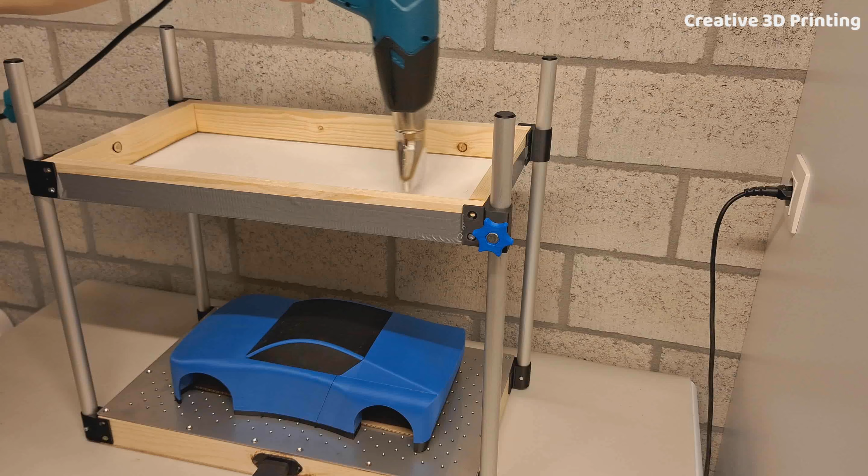Today I am building my own vacuum former to make a lighter body shell for my RC car. My current 3D printed body shell weighs 810 grams, which is way too heavy. That's why I want to switch to a vacuum formed body shell made from PS or PETG. Actually, I am building two: first a small prototype version and then a larger wooden version.

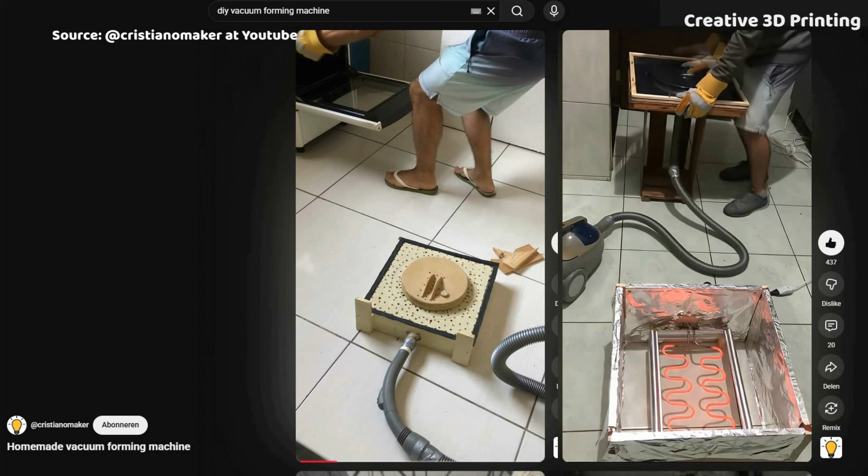I came across a video online of someone who built a small vacuum former using just an oven and a vacuum cleaner.

So I decided to start small. Within 24 hours I had made a fully 3D printed vacuum former, and it worked first try.

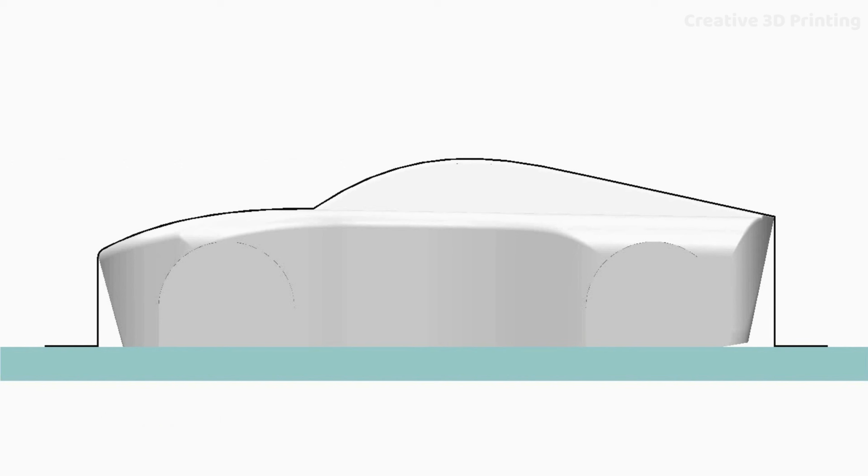The only issue is that the body shell itself isn't really designed for vacuum forming, because of the chamfered edges at the bottom. I'll fix that later in the video. It wasn't perfect, but it proved that the concept works, and more importantly, that scaling it up would be possible.

After that, I started doing more research, and for inspiration I looked at this video.

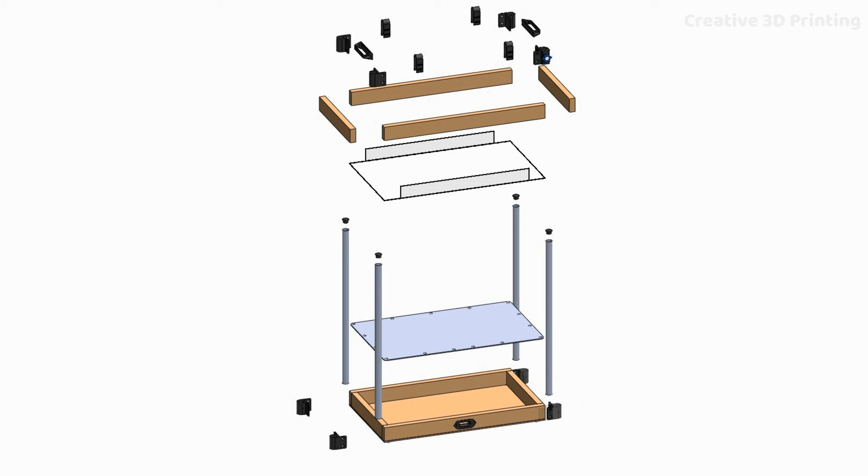Then I started designing everything in 3D. The design came together pretty quickly, with wooden beams, a base plate, a stainless steel sheet, aluminium tube profiles and some 3D printed mounting parts.

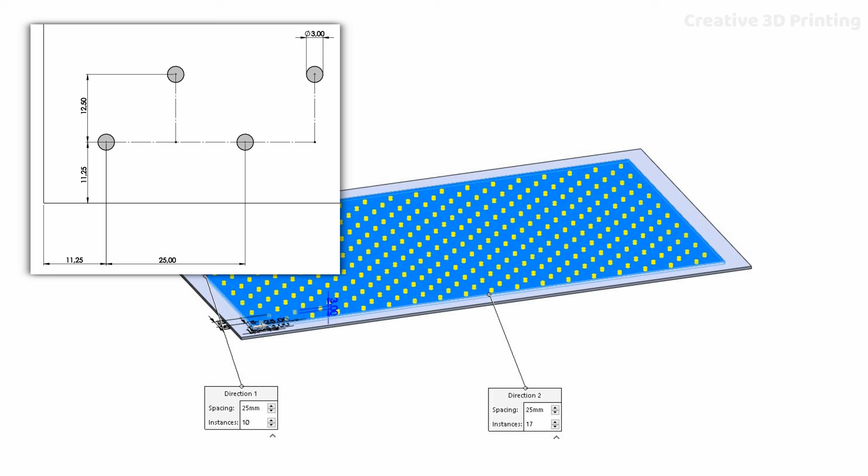The stainless steel plate needed a large number of holes with the correct size and spacing. So I gave AI the right parameters and it calculated the optimal pattern: 170 holes with a spacing of 25 mm and a diameter of 3 mm. I imported that pattern into my CAD software and just like that the full design was complete.

After that I ordered all the parts and printed the required components. I started by cutting the wooden beams and aluminium tubes to size, using the grinding stand I made last year.

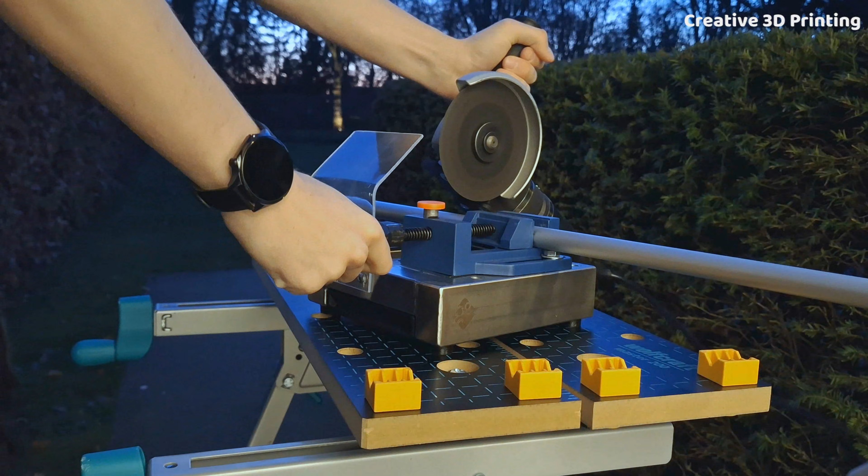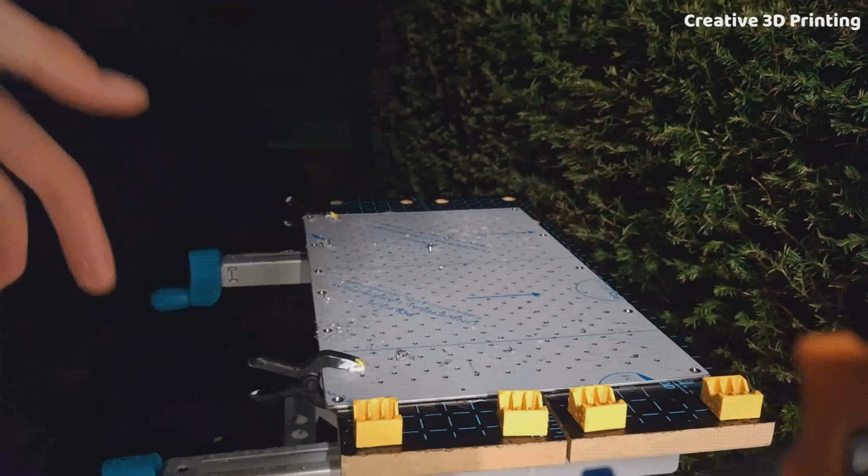In one of the wooden beams I made an opening for the vacuum cleaner connection. The stainless steel plate was punched and then I removed all the burrs for a clean finish. Once everything was ready, assembly could begin.

First I glued 4 wooden beams onto the base plate. While the glue was drying, I used my 3D printed clamps to hold everything in place.

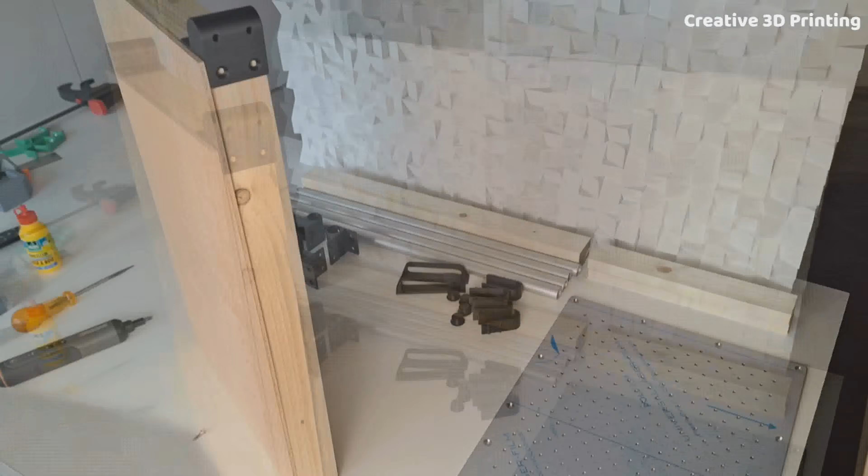Then I mounted the 3D printed parts using short screws. A lot of my screws were actually too long, which caused the wood to split, so in the end I used fewer screws than originally planned.

After that I glued the top frame in place, making sure it aligned properly with the bottom frame. These need to match perfectly in the end. Because my grinding stand isn't perfectly square, some of the cuts were slightly angled.

Luckily that's easy to fix with sealant. I used bisonwood sealant for this. The only thing is that I forgot that you actually need a caulking gun for that. I could have just bought one, but of course I decided to make one myself.

A clamp already looks quite similar to a caulking gun. So I designed a small holder that I could 3D print and slide onto the clamp.

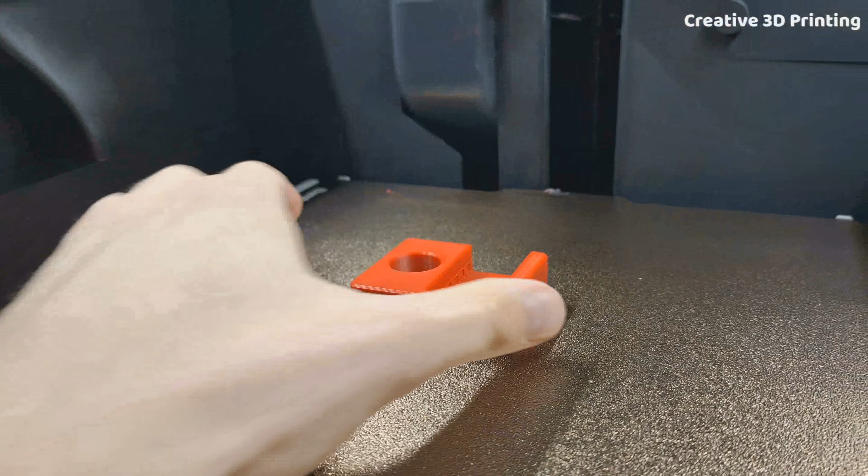With that, I sealed all the seams, the vacuum cleaner connection and the stainless steel plate to the wood. And surprisingly, it worked really well. I might buy a proper one in the future, but for now this does the job. I also printed a small finishing tool to smooth out the sealant.

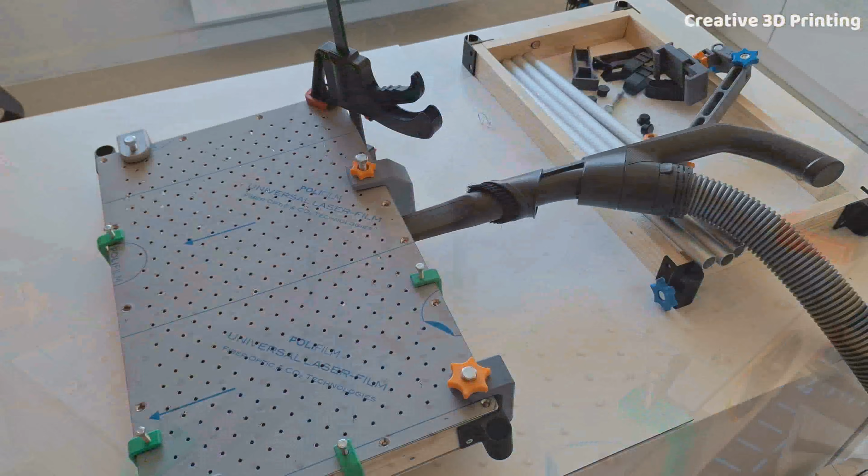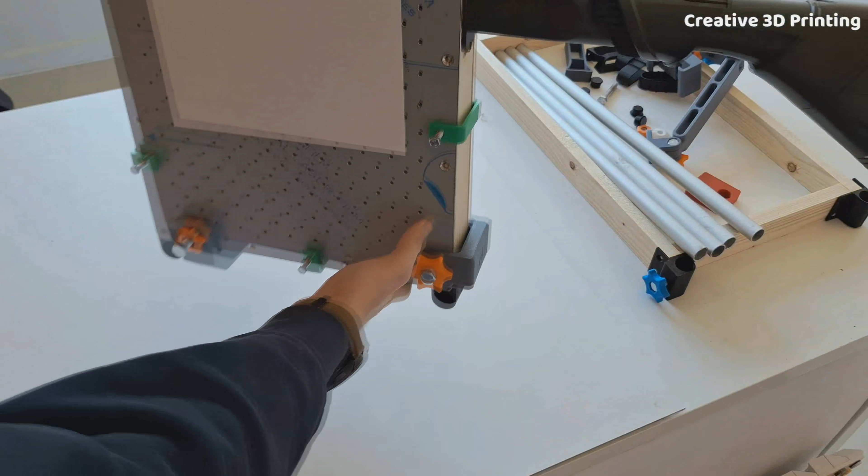Then everything had to dry for 24 hours. After 24 hours, it was time for the first test. I connected the vacuum cleaner, and as you can see, I have vacuum, so the bottom box worked perfectly.

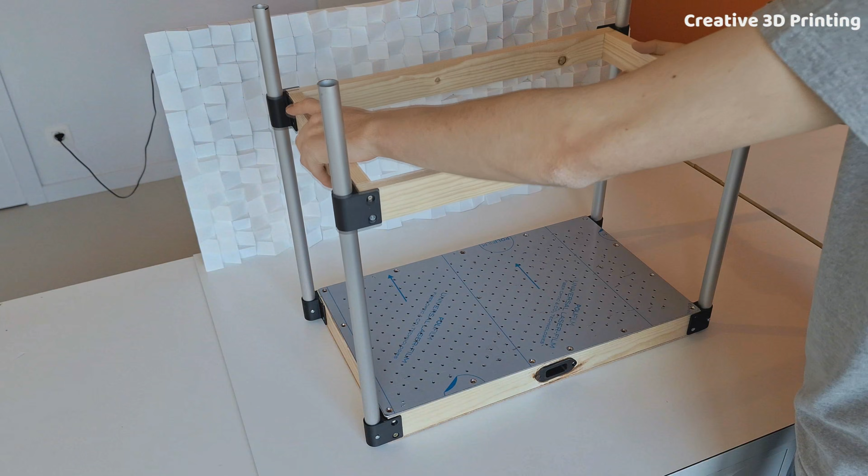Next, I mounted the aluminium profiles and secured them with bolts. Then I slid the frame over the profiles and fixed it in place with a large bolt. After that, I removed the protective film from the stainless steel plate. And with that, the large vacuum former was ready for its first real test.

For the test, I used a 1mm thick PS sheet in A2 format. My previous tests were A6 size, so this was a big step up. I cut the sheet to size and attached it to the frame using duct tape.

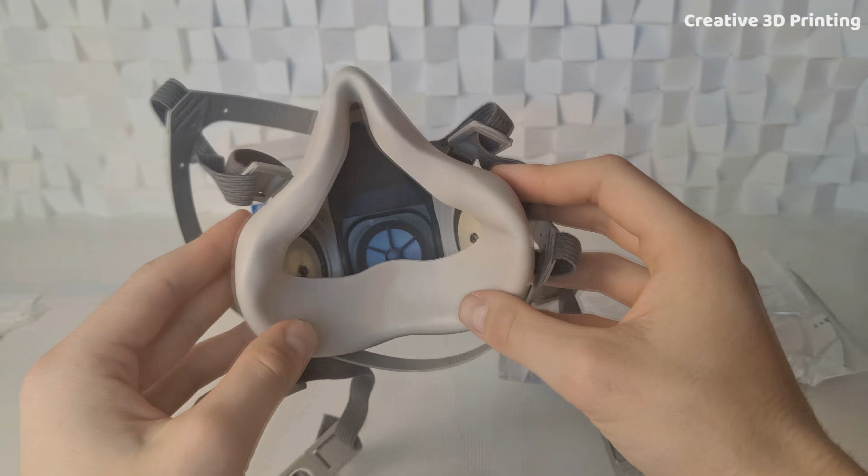Since polystyrene needs to be heated until it becomes flexible, I also used a half-face respirator with an ABEK1 filter on each side and a dust filter.

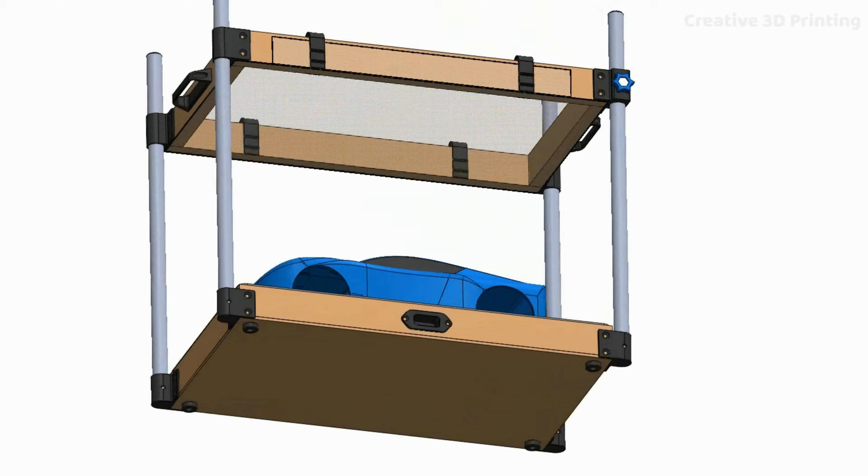Because the body shell is quite large, too much vacuum would be lost through all the open holes. So I placed a piece of cardboard under the mold to block some of the holes. Then I heated the sheet for about 5 minutes using a heat gun. I turned on the vacuum cleaner and lowered the frame onto the body shell.

But unfortunately, the sheet was too large to heat evenly. By the time one section was ready, the rest had already cooled down, and because of that, it didn't work. I tried again with a smaller shape, but that didn't work either. The sheet cools down too quickly, and it also seems like there wasn't enough vacuum.

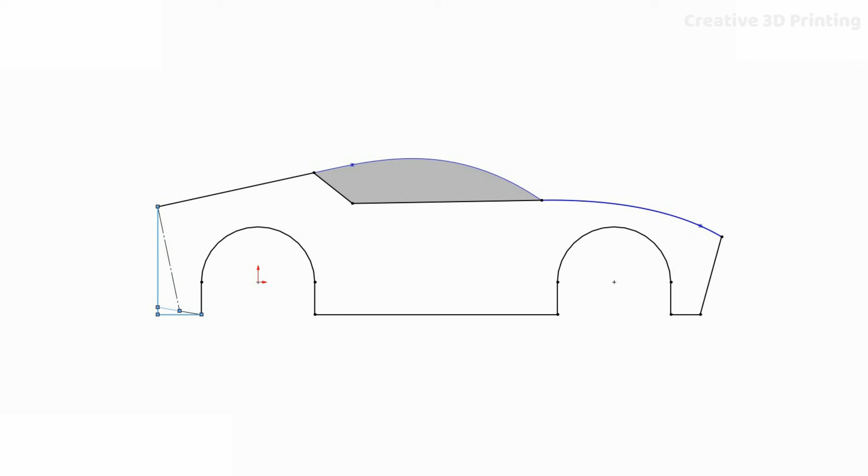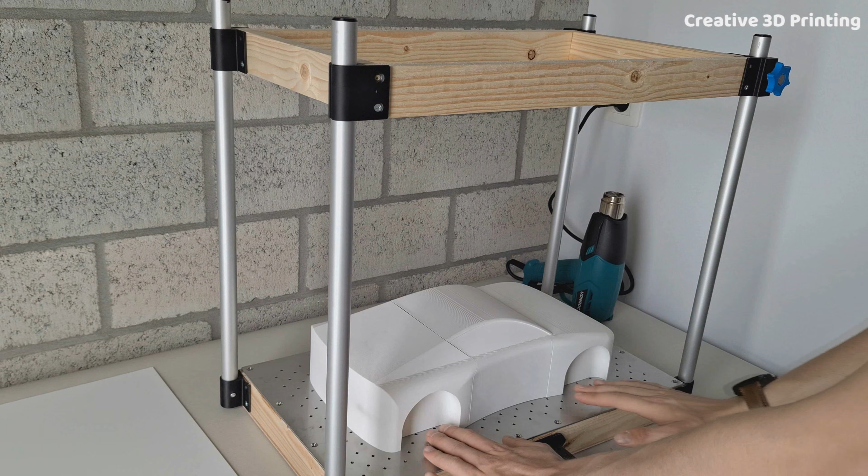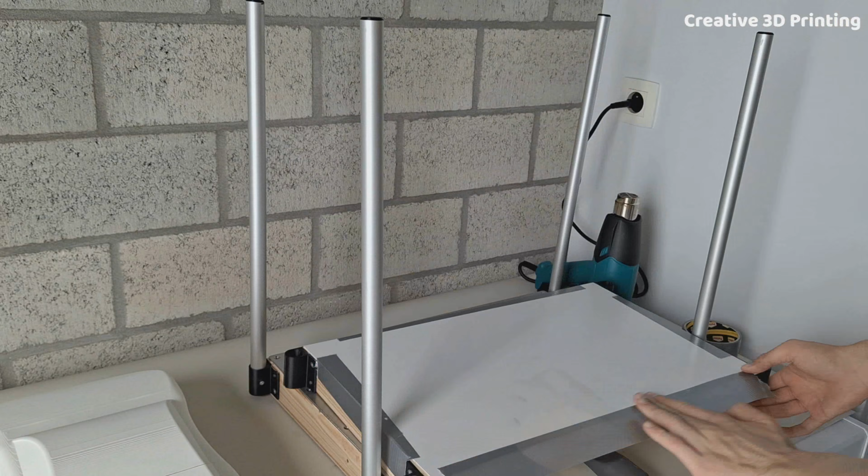Since the large vacuum former still isn't working optimally, I'm going to give it a third attempt. This time, I'll approach it a bit differently. I'll modify the body shell slightly to eliminate so-called vacuum traps or undercuts. I will also make the bottom of the body shell completely flat, so it has the same effect as blocking some of the holes. And finally, I will use an additional heat source to ensure the sheet heats up more evenly.

Still not perfect, but for now I'm putting the large version aside.

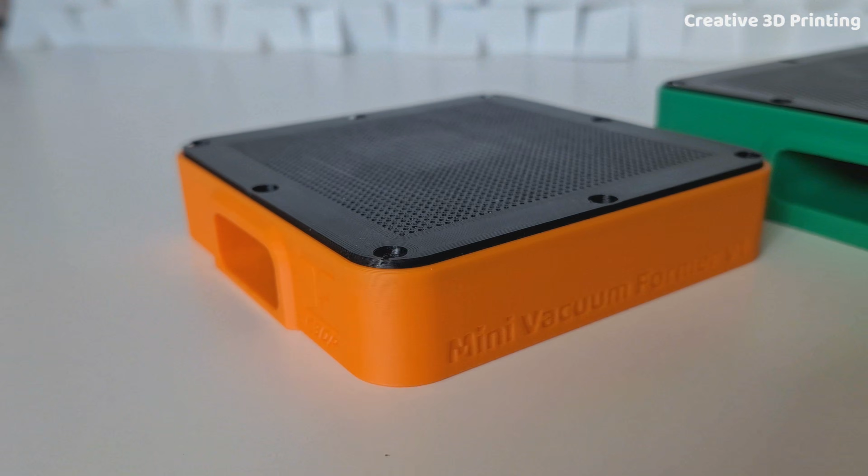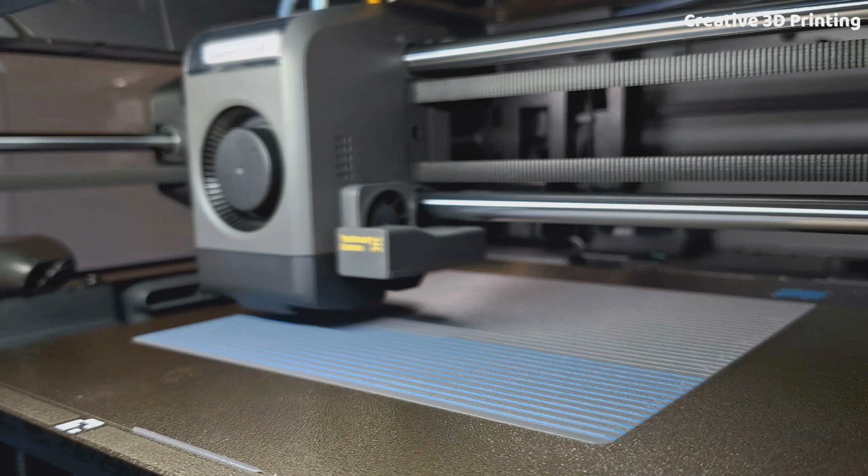This small 3D printed vacuum former does work really well though. I've improved and scaled it up a bit, so it's easier for anyone to use. You can download it for free on MakerWorld and print it yourself. And if you don't have PS or PETG sheets, you can even 3D print your own sheets. As you can see here, it actually works surprisingly well.

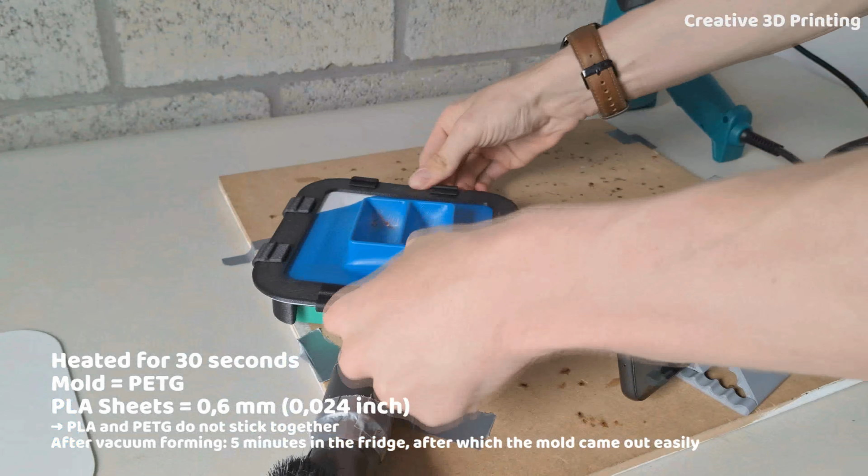Since the large version isn't quite where I want it yet, I'm wrapping up this video for now. And I'll see you soon in part 2 of this project.